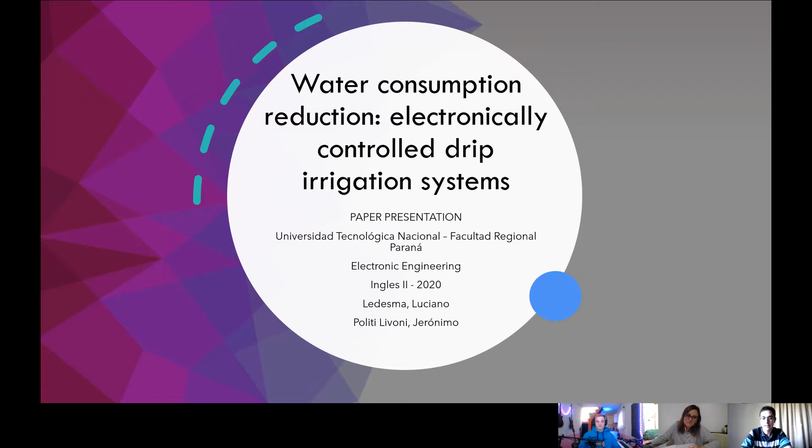This is going to be our presentation, our paper presentation. This is a great day for us because this presentation is going to be the conclusion of this hard work we have done. So, let's get started. Luciano is going to start with the introduction of this project about the water consumption reduction with an electronically controlled drip irrigation system.

Okay, good morning. We started talking specifically about the water crisis and its impact on health and the environment. And we continue talking about an engineering contribution for the society. Continuing with the next slide, we have the basic aspects about the water crisis.

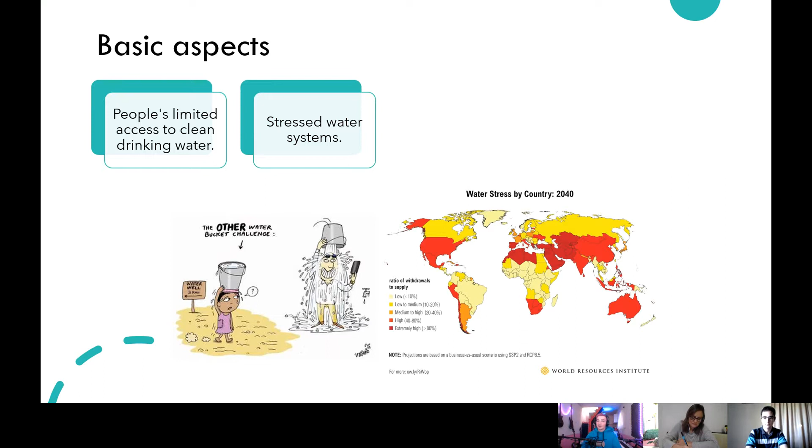It is a well-known fact that the world is facing a big crisis related to water and its scarcity. We know that the water systems are very stressed around the world, and we have to understand the right of the water to our lives.

Here we have a few pictures about the water crisis, but specifically in the picture of the world map, we can see the water stress by country for 2040. It is a projection, and we can see that it is notoriously severe. And this is why we must take action on this problematic. Now, Jerónimo continues with the basic aspects.

So when we talk about the water crisis, we have to understand what water scarcity is. Most people tend to think they are the same, but we have to understand that water scarcity is actually one of the causes of the water crisis. And this is a wide problem. Water scarcity is also caused by other causes, and one of the main causes is availability.

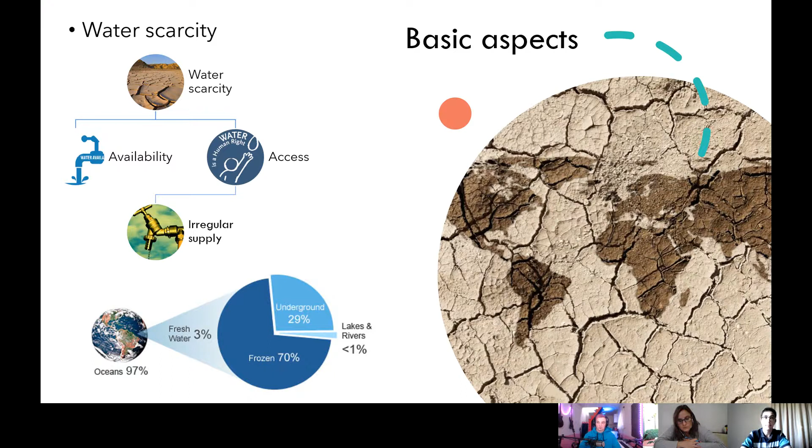So from understanding these figures, it is easy to understand that those countries or areas around the world that do not have access to lakes or rivers will need extra work to get that fresh water. And here is where we come to the other problematic, which is the access to this water. It can be caused by an irregular supply, which happens, for example, when the government wants to control the water consumption, and this can be especially seen in dictatorships.

The other problem is about the infrastructure. If those countries don't have a special infrastructure to get that water, for example, underground water or frozen water, or even salty water from oceans, where we must go through a desalination process, those countries will not have proper access to fresh water. So water scarcity is a wide problem. It's not just about water availability, and it is one of the main causes of the water crisis.

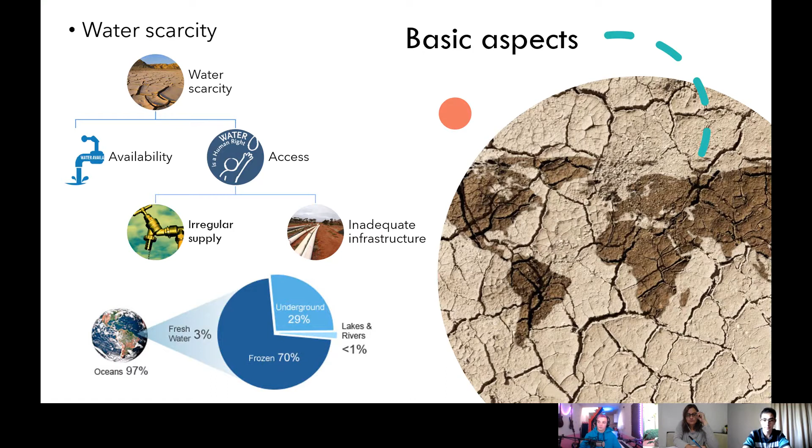So it is our responsibility as part of society, of course, but also as engineering students to come up with solutions. In order to state a possible solution, we have developed this investigation about not a solution, but a contribution, because it is known from United Nations statistics that 70% of water consumption every year is caused by agricultural processes. So we have developed this investigation about a drip irrigation system that can help to reduce that consumption.

To introduce you to this system, we are going to follow these sections. First, the definition, in which Luciano is going to introduce the system. Then we'll go through the advantages and disadvantages of the system. We have divided them in three main categories: the water and soil issues, where we will see how this system works with the water, how it can help save water, and how it affects the soil. Then issues related to cropping and cultural practices, which relate to how the farmer makes this system work with the crop as a whole.

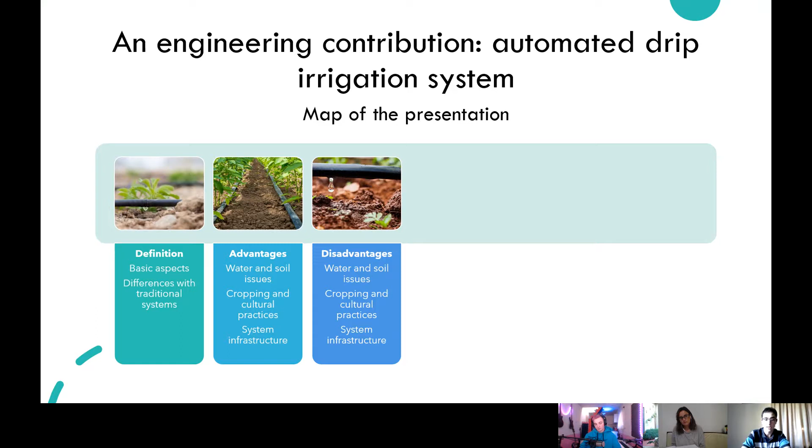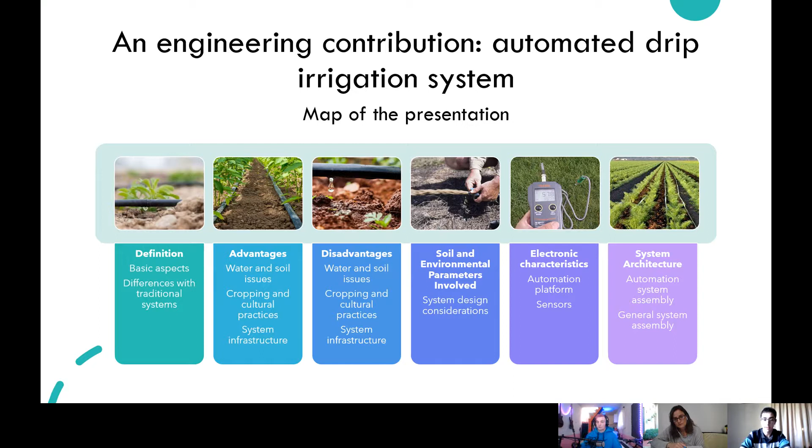And finally, the system infrastructure, where we can see how this system can be developed. Then the remaining three sections will be about the design of this system. First, we'll see which soil and environmental parameters are involved. Then we'll see some electronic characteristics that we can make use of to turn this system into a smart system. And finally, we'll see the system architecture: first the automation section or electronic unit assembly, and finally the general system assembly.

Okay. Now addressing the definition of the system, a subsurface drip irrigation system is based on the application of water, of course, in a slow and localized way to the plant. Basically, the composition of the system consists of tubes around the plant, and these tubes have a regulated water drip. Next, the development of the system has some advantages and disadvantages that we are going to talk about in the next slide.

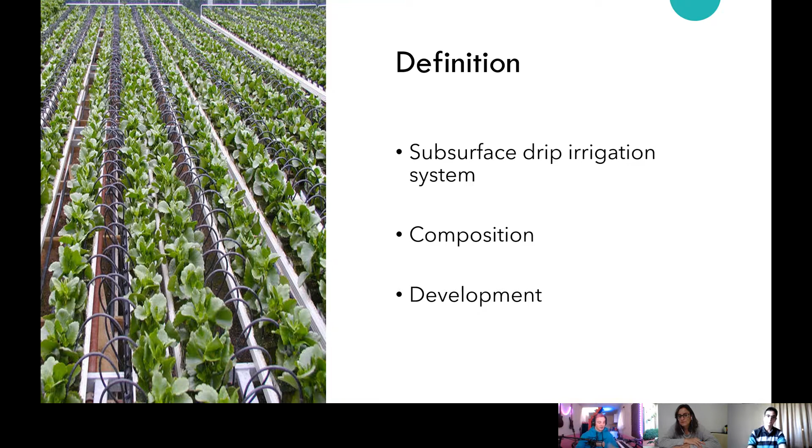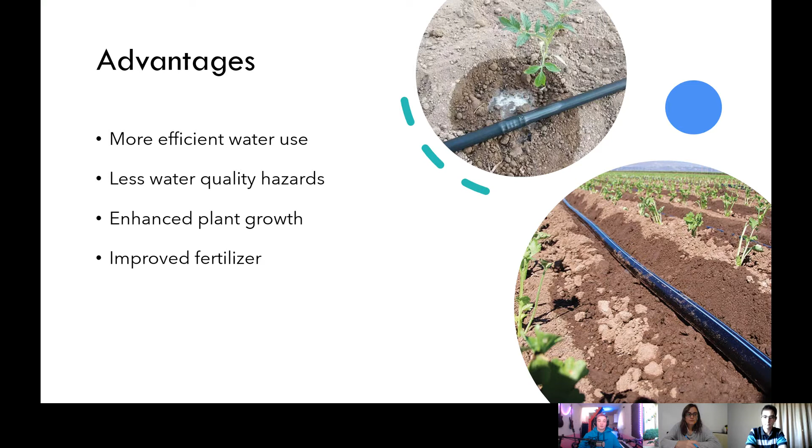Now, starting with the advantages, we can see more efficient water use, and this is because the system uses localized irrigation. We can see less water quality hazards and enhanced plant growth. And this is because we can have a specific control of the water use, and this is why we can also see improved fertilizer use and better weed control. Now continue, Jerónimo, with the disadvantages of the system.

This is a process in which the water tends to sink through the pores of the soil, and it reduces the wetting pattern around the roots of the plant, because as I say, the water tends to move downwards.

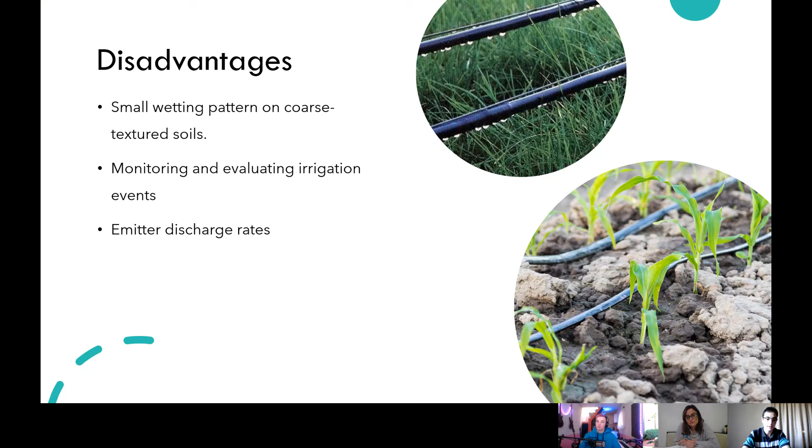Then we have the emitter discharge rate. This is because if an emitter has a fast discharge rate, the water comes out too fast. In some kinds of soil, it will be difficult for the soil to redistribute that water, and too much water can stay in the root zone, and we know that is not good for the plants. They need, if possible, an equal input rate and output rate of that water.

Then the location and positioning of the drip lines. This is because if the drip lines are near the surface, the tillage options can be reduced, and it can hinder the possibilities of using some machinery for the tillage process. Then we have restricted plant root development, because it can occur if the drip lines are near the roots or the stems of the plant.

The plant itself cannot have a wide enough area to develop its roots, and this is one of the main parts of the plant because from the root the plant takes the nutrients from the soil. So if it cannot develop a wide root zone, maybe the growth of the plant or of the crop can be reduced.

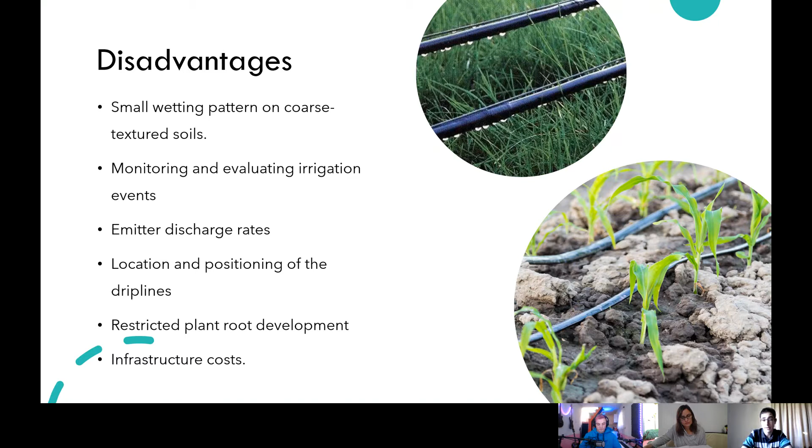So in order to help with this, it is necessary to increase the production of the crop, or the crop yields, in order to make it possible in the future to invest in maintenance or in a whole system replacement.

So we need to get some characteristics of the soil in order to design the system. We are going to focus on the automation of the system, not on the drip lines or drippers or tanks, because it is not the aim of this paper. We want to introduce the electronic characteristics that we can apply to the system. So first of all, we need to know how much water we need to apply to the crop.

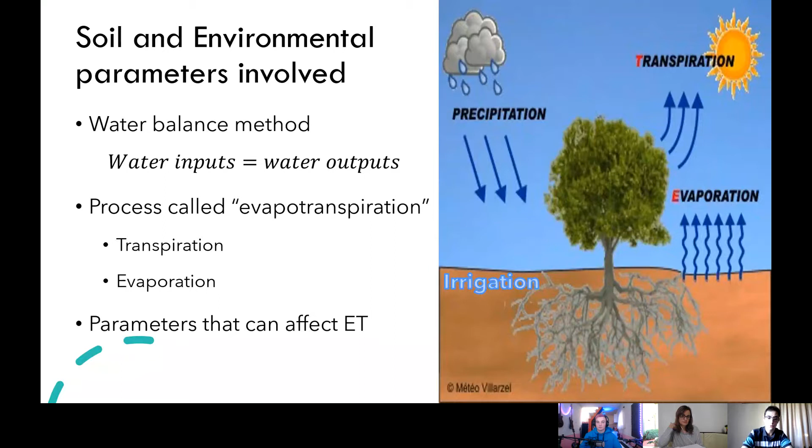So, as we can see there, we have the water balance equations. It relates those parameters we have seen. I and R represent irrigation and rainfall. ET sub C represents the evapotranspiration for the crop that we are studying. P is percolation, the process that we explained earlier when the water moves through the pores of the soil. S represents seepage or filtration of the water in or out of the root area. In this case, it is out of the root zone.

R sub off is runoff, the water that moves through the surface, and D sub W is the change in the water content of the soil during the time period that we are studying. So many of these parameters are difficult to measure, or they cannot be electronically measured. So for this system, we can just make use of three of them.

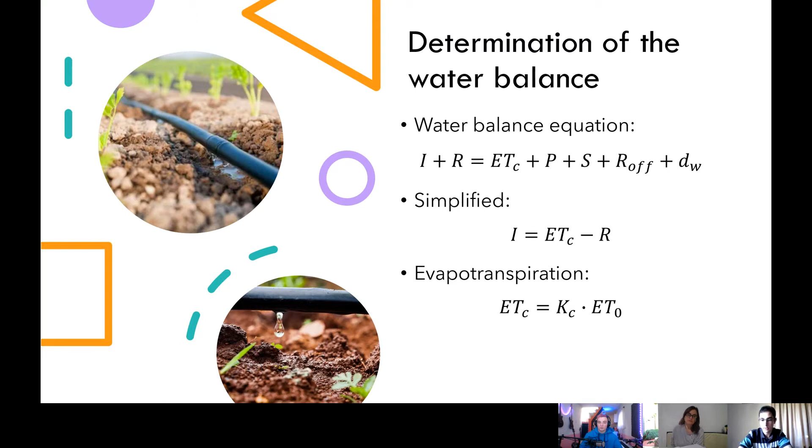So the evapotranspiration can be determined, as we can see there, as Kc times ET sub 0. ET sub 0 is the reference evapotranspiration, and it depends on many conditions. It is mainly affected by weather or environmental conditions such as solar radiation, wind speed, altitude, air temperature, and relative humidity. And those are all parameters that we can measure by using sensors.

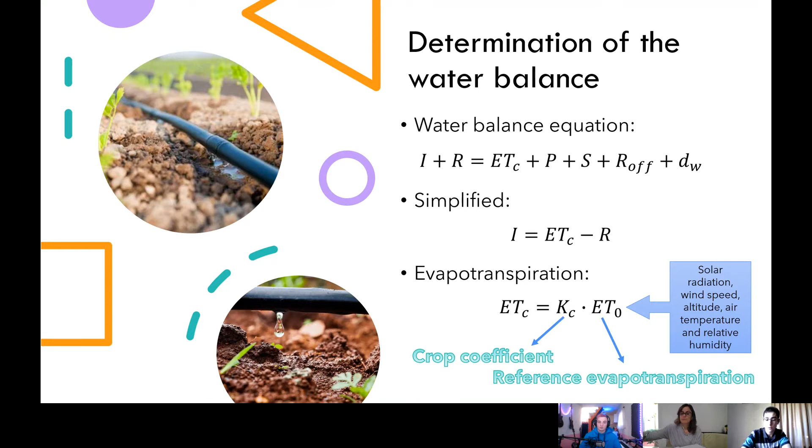And K sub C is the crop coefficient. It is a dimensionless number, and it adjusts the reference evapotranspiration to the crop that we are studying. And this value can be taken from charts, from tables, as we can see there, and the chart on the right comes from some areas in India.

We can see, for example, that we have some crops at different locations, and we can say that for Paradip, which is a region in India, the tomato crop coefficient in January is 0.6, and that is the value that we need to apply to that equation in order to modify the reference evapotranspiration. And it can also change according to the crop development time in the season. Depending on which time of season we are, this value can also change.

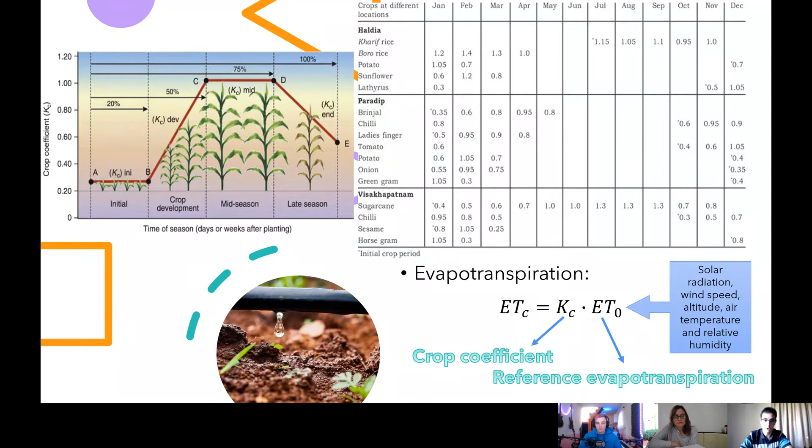So, in order to measure that reference evapotranspiration, we need to make use of an electronic system. And now Luciano is going to explain how we can do this.

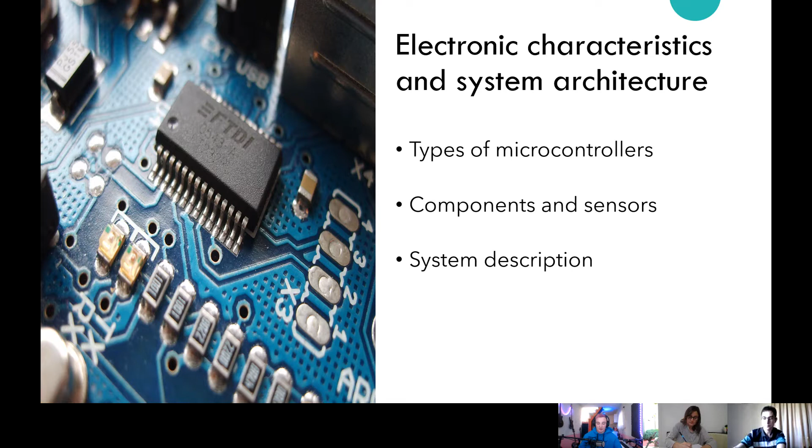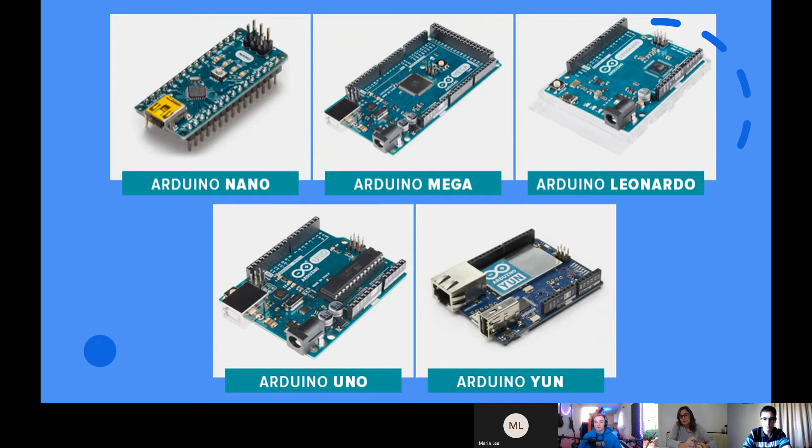Arduino basically is a very widely used microcontroller within electronics. Arduino works with an open source platform and with open source libraries. And we can also see another microcontroller like Raspberry Pi, but for our system we use Arduino. Now, Jerónimo continues with a few types of sensors for our system.

And it makes use of those two pads which need to be buried in the soil. And it acts as a variable resistor, because when the soil has a high moisture or water content, the current flow from one pad to the other is going to be higher than when the soil moisture is low. So we can measure this difference in the current flow in order to determine the soil moisture content.

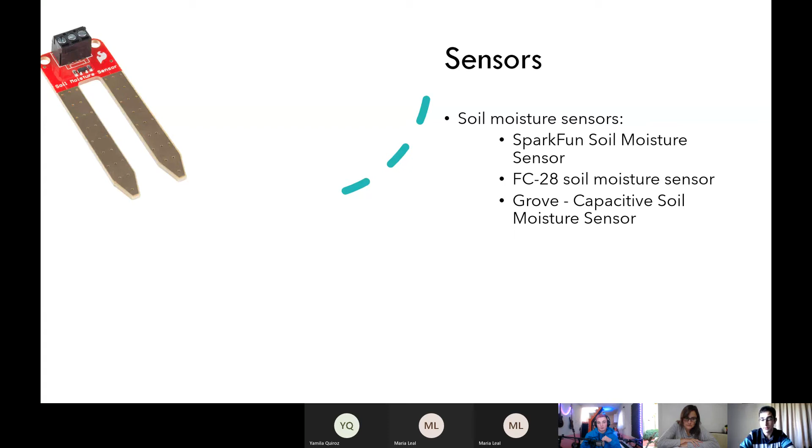It is a good option because it is a tiny board. It is 0.7 inches by 0.7 inches, so it can fit almost everywhere, and it also measures barometric pressure. So from all those parameters, we can also determine the altitude. And as we saw in the previous slide about the reference evapotranspiration, that is a parameter that is going to be useful for determining that value. We can also use DHT11 and DHT22. They are cheaper sensors, and they just measure temperature and relative humidity.

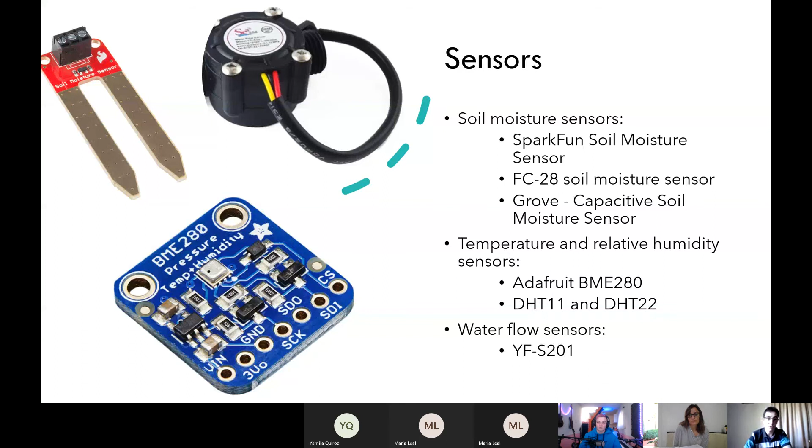It goes in line in the main water line, and it has a spinning wheel inside and a Hall effect sensor, which detects when a magnet passes in front of it. So this spinning wheel has a magnet, and because of the water flow, this wheel is spinning, and every time the magnet passes in front of the Hall effect sensor, it sends a pulse. So measuring the frequency of this pulse, we can determine how much water is going through the line, because in a way we are measuring the speed of the wheel.

So now that we know which kind of sensors we need to use, and the microcontroller that we are going to use, we can develop the electronic unit block diagram. And we start with the Arduino microcontroller in any of its versions. The version will depend on how many inputs or outputs the project will need, but it will need to be stated in the design stage of the system.

Then we have signal conditioning circuits that will help the Arduino microcontroller to properly read and keep track of the sensor readings. And then we have the sensors we have previously seen: soil moisture sensors, environmental condition sensors, and the flow rate sensor. Then we have driver circuits, which help the Arduino microcontroller to control those loads that need more power, for example, the water pump or the valves, which need to be activated from the electricity coming from the grid. So the Arduino microcontroller will send a signal to the drivers, and then the drivers will activate the water pump or the valves.

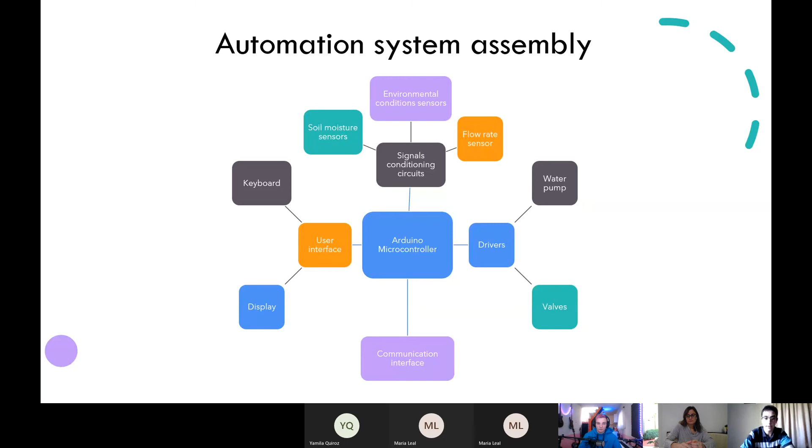Then we have the user interface, which can be developed by using a keyboard and a display, and it will help the user to control some parameters, for example, soil moisture thresholds, which will tell the system when it has to activate or not. Or, for example, an irrigation schedule can be programmed, and if the soil moisture sensors fail, the user can activate this time-based program in order to keep the system working. And now Luciano will present the general system assembly.

Yes. Now, talking about the general system assembly, in this picture it is possible to see how the system must be implemented. We start with the water source. Next it is connected with the water filter and the water pump. The water pump is connected with the power supply and the electronic unit. The signals of the environmental sensors enter the electronic unit, and the electronic unit is connected with valves, soil moisture sensors, and the crop row. After the water pump, we can see the chemical injection unit, and next the flow rate sensors. And all this set forms the complete system.

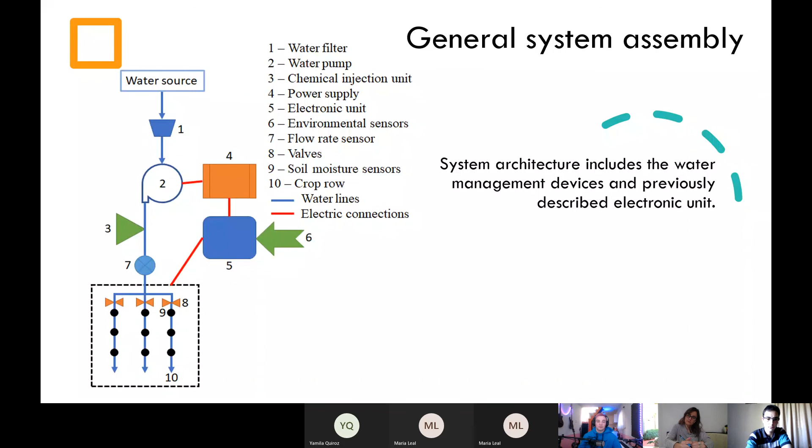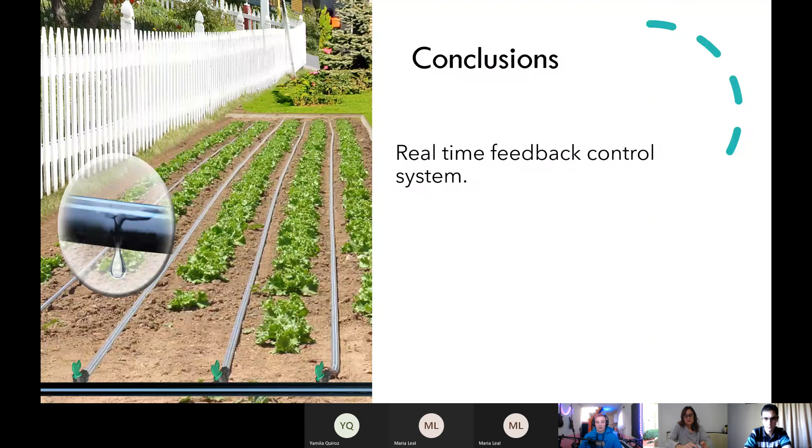And finally, in the next slide, some conclusions we reached in the development of this work. First, we can see real-time feedback control systems, thanks to the processing power of the microcontroller. Second, we can see an effective model for modernizing small and large-scale industries. This is a great point because the application in the Argentine industry is very possible. And finally, we can see effective water and resource saving. This is a great point. It is the main problem that motivated the research and this work.

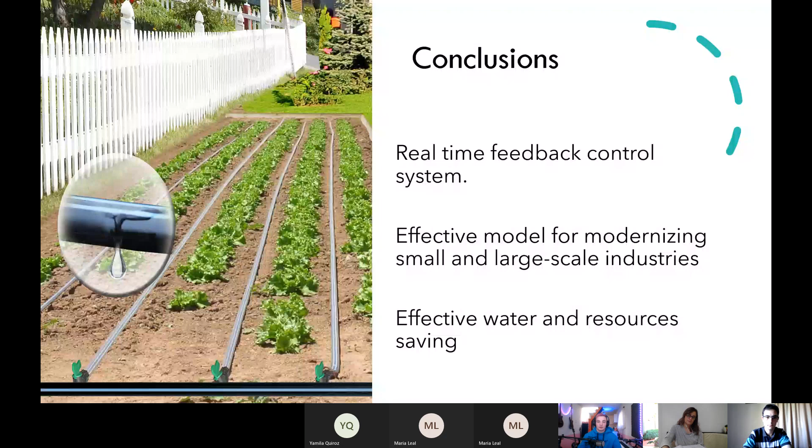Next, we can see the references. And this is all of the presentation.